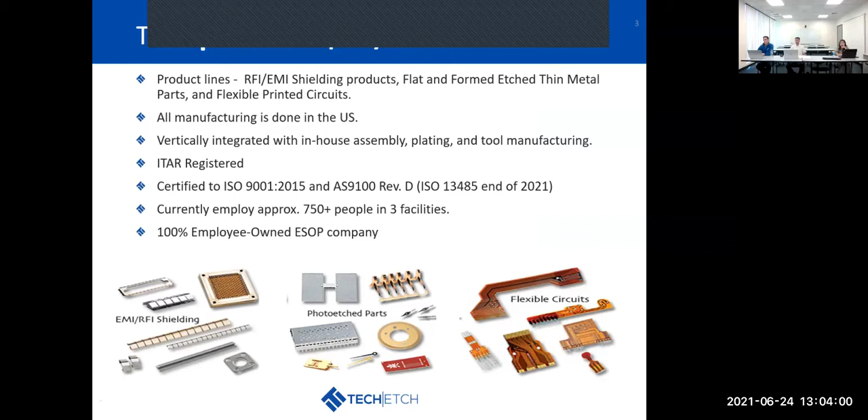Currently we employ approximately 750 people across 3 facilities, which I'll discuss further along. Another great thing about TechEtch is that we're 100% employee owned through our ESOP program.

About 45 minutes west of our main headquarters in Plymouth, Mass, is our Fall River facility, whose main focus is shielding manufacturing. That facility is approximately 46,000 square feet.

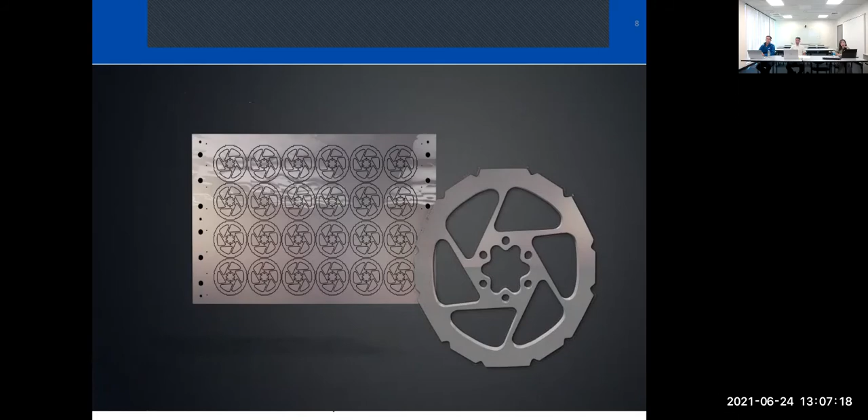Drawings are taken from computer data and photo plotted onto film, creating areas on the film that are either black or clear. Depending on the type of photoresist being used, either the clear areas or the black areas will be the image of the desired part. Generally, there are 2 pieces of film created that are aligned precisely front to back.

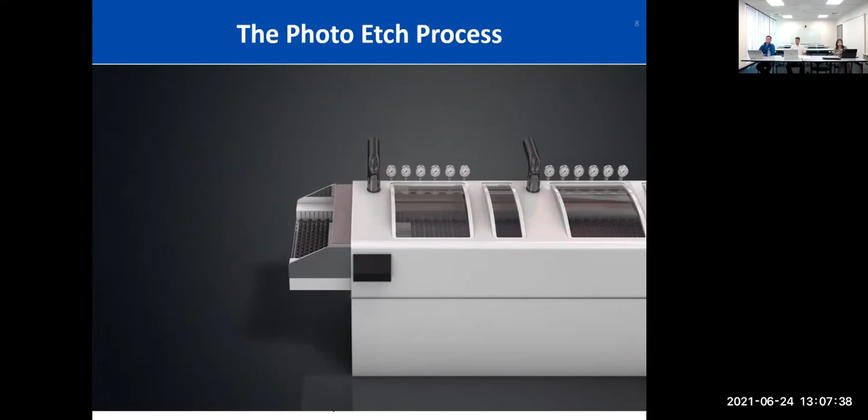Metal is then selected, and sheets are cut to match the size of the film created. The metal is then cleaned to remove any residual oils and oxides. It is very important to have clean surfaces on the metal to make sure the resist that will be applied will adhere successfully. The sheets are then coated with the photosensitive resist.

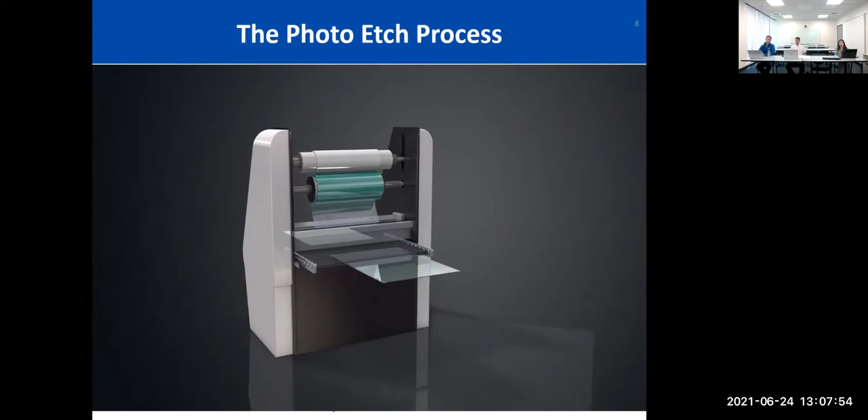The resist is sensitive to UV light and resistant to acid. After the resist is applied, the material is then placed between the 2 pieces of artwork that have been created. The resist-covered sheet is then exposed to UV light to create the desired image on the coated metal.

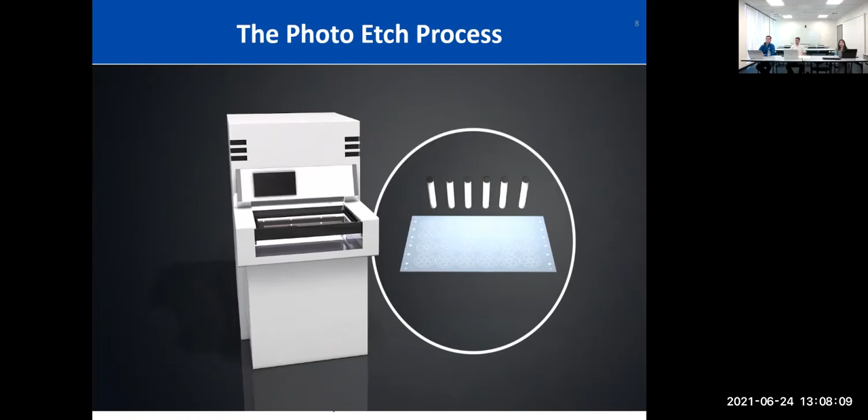Generally, where the light shines through the clear areas of the film, the resist is exposed and becomes hardened. Where the resist is shielded from the light by the black areas of the film, the resist remains soft. After exposure to the UV light, the sheets are put through a developer where the soft resist is dissolved away and the hardened resist remains.

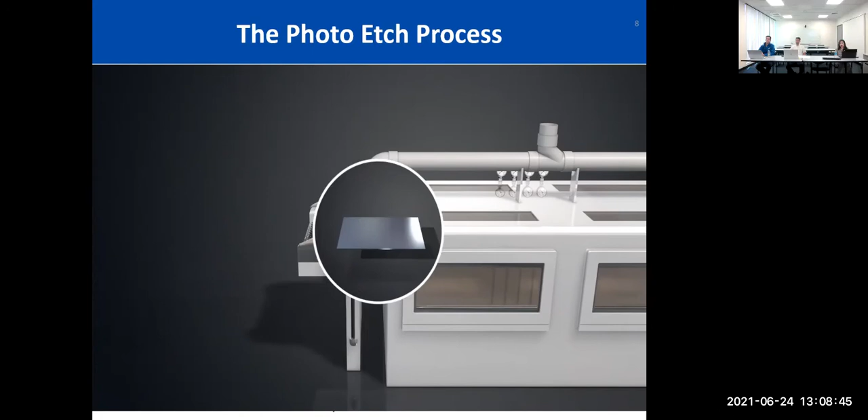The sheet of material will then have resist remaining in the areas where the material needs to remain, while the rest of the sheet has exposed metal where the material is to be removed. The next step is to have the sheet put through an etching machine, where etchant is sprayed on both sides of the sheet. Where the etchant comes in contact with exposed material, the metal is dissolved. Where the resist has been applied, the material will be protected from the etchant.

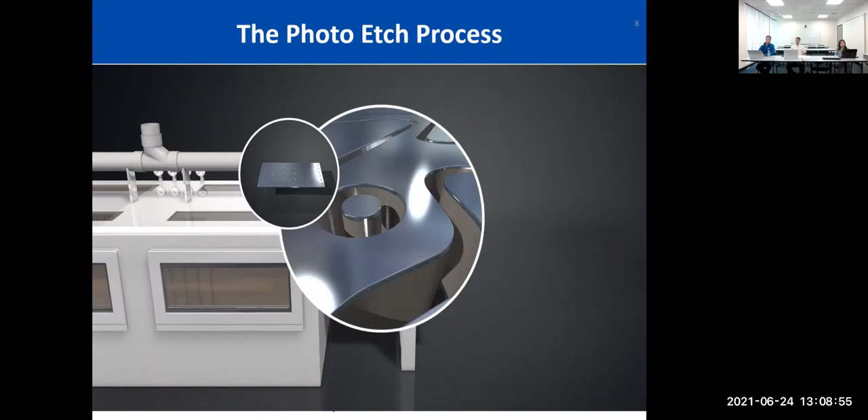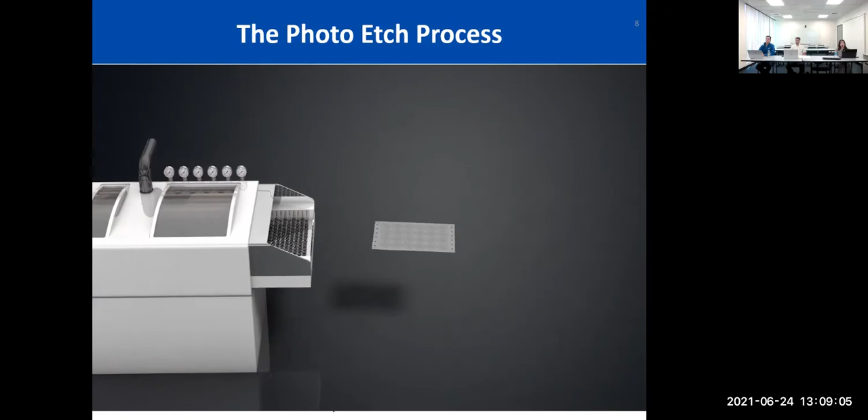When the sheet is finished etching, the remaining resist must be removed. This is done by applying resist stripper, which dissolves the resist. The result is the finished etched part.

And that's pretty much the cycle. So we have a little expression internally: clean, coat, expose, develop, etch, and then we strip away the resist.

Understanding this process gives you an understanding of each of our product lines and how we manufacture the product. Our first product line is the photo etch, or precision etched and formed product line, with materials starting at approximately 0.5 mil thick, going up to 40 mil. Typically after 40 mil, we start getting into laser cutting of that process. The good thing is we're compatible with both ferrous and non-ferrous alloys. Noble metals such as gold or silver, we don't etch directly—it's not etch compatible—but the good thing is we do finishes with those processes.

The good thing about the photo etch process is we're able to etch multiple parts within a panel at the same time, so we gain efficiencies in both cost and time. It's also burr free, so it's a great product. We're able to hit very fine line features, and it's great use.

We also have the ability to form this product, and we have 3 different functions for doing so: hand bending on depth etch lines, dedicated hard tools if you're going into production, and if it's low volume R&D, we do prototype tooling.

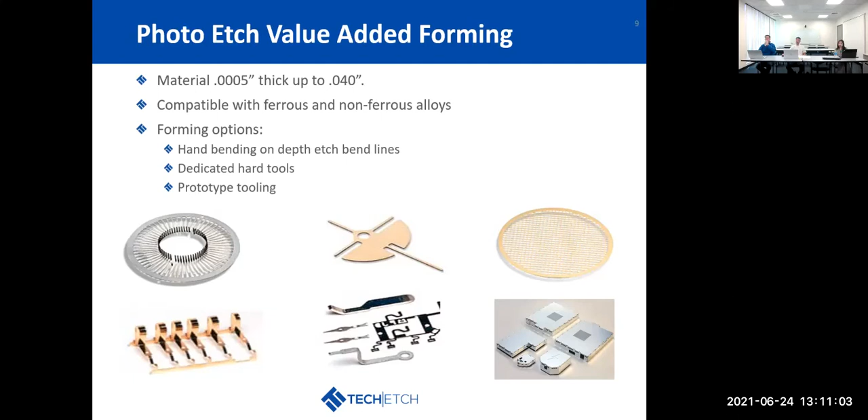We do finishes such as tin, lead, gold, both hard and soft. We do nickel, electrolytic and electroless. So we have a wide variety of finishes that we can help support in terms of finishing that metallization.

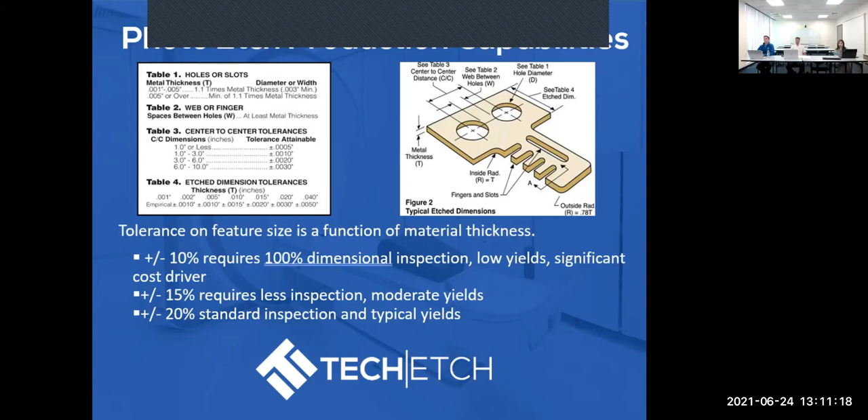I'm not going to go too in depth in terms of design features and capabilities. If you guys have any questions or concerns, please feel free to reach out to me. I just want to emphasize that when you come to TechEtch, we're going to help facilitate you in terms of the design—meaning we'll help direct you down a path that's both manufacturable and cost efficient.

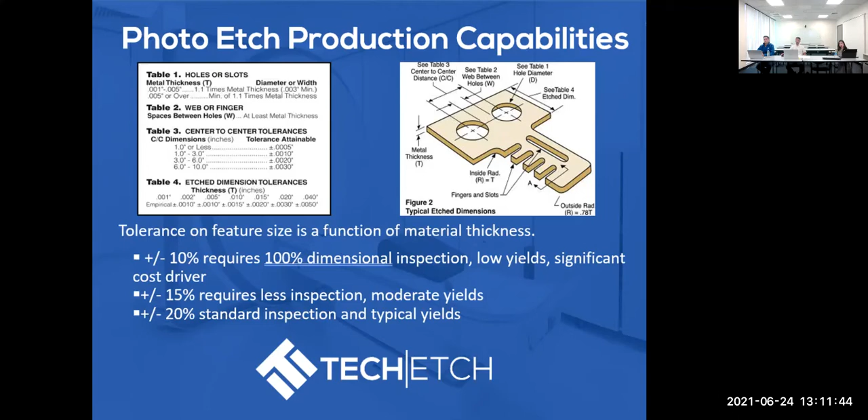Not only do we want to help you in the R&D stage, we hope to secure that production order. So if we can offer the best price possible, we of course want to facilitate you guys in that process.

So the next product line we have is the Flex and Rigid Flex circuit program. We're able to offer both single and multi-layer flex circuits—by multi-layer, that's 6+ metal layers. We also offer a very unique process, which is our polyimide etching.

I'm going to point my cursor to the part here and give you a little circle. So what we're able to do is chemically etch or remove the polyimide in select regions. That allows for access to your metal feature set from both the top and bottom side, and the great thing is, without the use of an added value component, you can lay your flex circuit on, say, another PCB or application and bond directly to that.

We also do contoured, what they call sculptured flex circuits, which I'm pointing to right now. A contoured circuit basically has thick leads in one section—say you need to solder and need a robust lead for fear of fracturing it. We can go really thick in select regions and then narrow down in the rest of the flex circuit, which allows for that flexibility, or lets you slip it into a tight feature set.

We offer both subtractive and semi-additive processes. Semi-additive is a little more expensive, but allows for very tight feature sets, narrowing down to less than 1 mil trace and space. That will be part of the DFM dialogue on what process is required based on your design, and again we'll try to facilitate you down the right path in terms of what you need, while providing the most price-friendly offer.

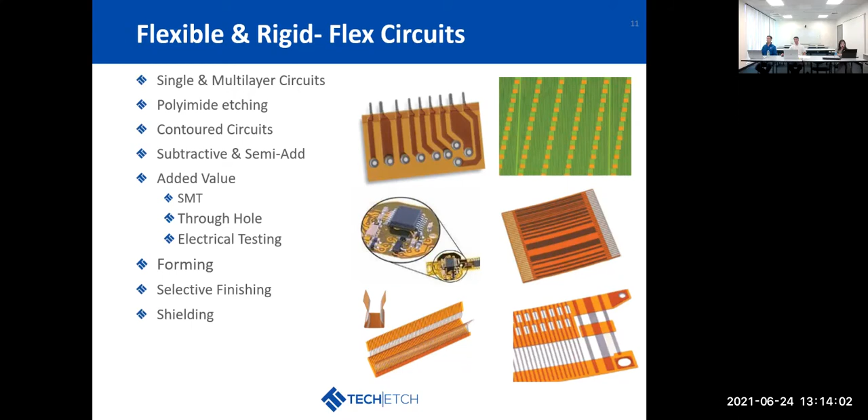We've also learned through the years, through our precision etch and form team, that we can form flex circuits as well. I'm going to point to a part down here that is formed as well.

We do selective finishing, which is shown here. You may need this, for example, if you have a ZIF connection where you need some hard gold on some contacts, but then need to solder a connector on the other end. We can support you with different finishes to help facilitate your assembly process. We also do shielding on flex circuits as well.

Another unique thing we do is use foreign coppers—I call it foreign for flex circuits. Instead of just your standard copper, we've learned through our precision etch team that we can apply different metal sets to flex circuits, such as stainless steel and so on. Pretty much any metal that we can etch, we can apply to a flex circuit.

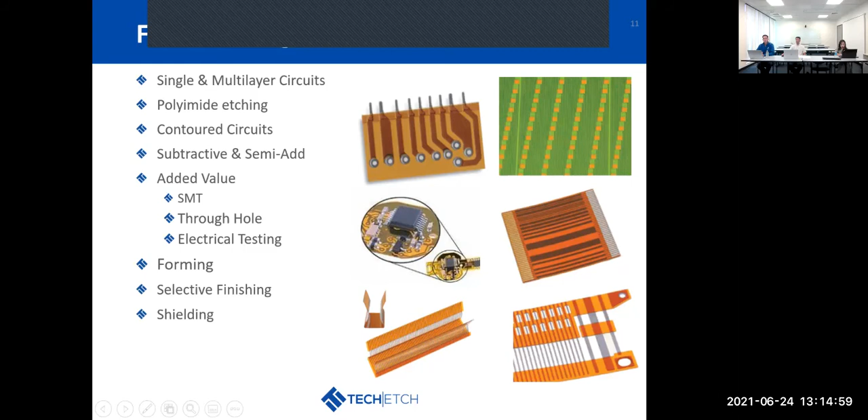Our final product line is our RFI/EMI shielding. These are just a few examples of products we supply. We supply off-the-shelf products, and we also supply custom designs.

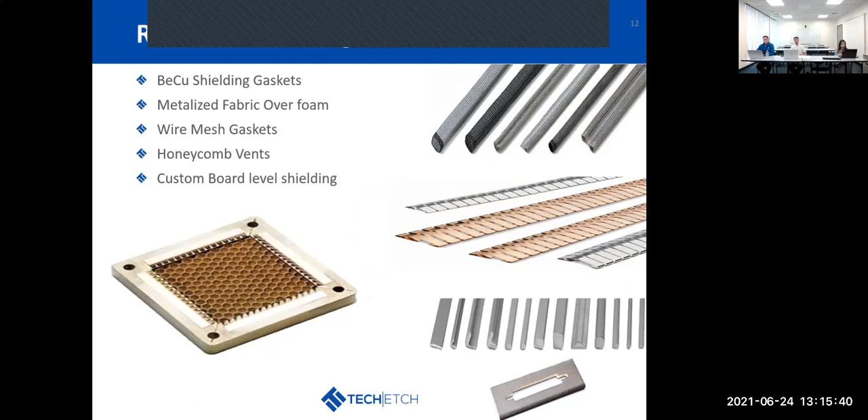We have our beryllium copper shielding gaskets, which I'm pointing to now, metallized fabric over foam, which I'm pointing to down below, wire mesh gaskets, our honeycomb vents, and we also do custom board level shielding. Again, we can etch and form, and we can also join the edges by welding, soldering, or creating mechanical joints.

Now that we've given you a quick overview of the product lines, we're going to talk more specifically about the Innovation Center and how it can help you with regards to quick turn deliveries.

Thanks, Chad. So what is the Innovation Center? It's our newly renovated manufacturing space, located right here in Plymouth, Massachusetts, which is our headquarters, like Chad mentioned during the overview. It's 3,700 square feet of floor space, dedicated specifically to prototype equipment.

What I mean by that is, as we'll discuss a bit more about the types of projects we do and when you might want to use the Innovation Center, this equipment is designed for low volume work, flexibility, and adaptation. Basically, it's more of a lab setting so that we can adjust to what our customers are asking for—we can adjust our equipment very quickly.

The purpose of the Innovation Center is to support our customers' most demanding prototyping, development, and quick turn project needs. That's all—the space we built, the equipment we purchased, the technicians and staff—it's all dedicated specifically for this mission and purpose.

This Innovation Center allows us to focus on small production runs that are in the prototype and development stage. We can provide focused attention and care, all without disrupting either normal production deliveries or the overall engineering and sales staff focusing on our main production. Think of the Innovation Center as dedicated to these prototype builds, development builds—low volume, high flexibility—and we're going to get into that more now.